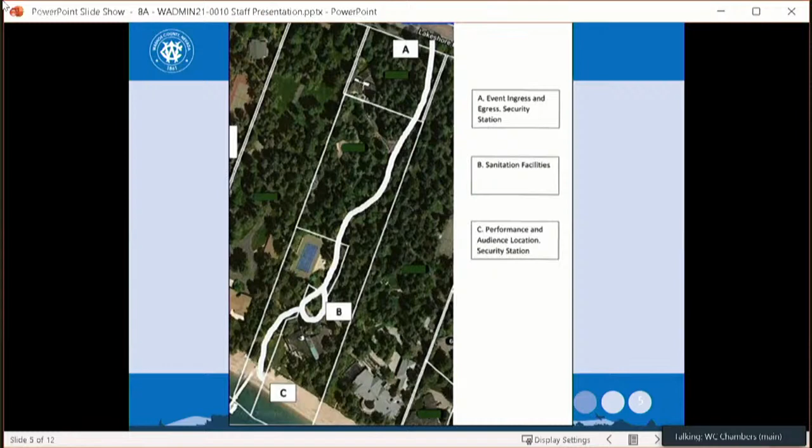Overhead is a site plan or graphic of the proposed property and event. The event ingress and egress and security station are up at the north end along Lakeshore Boulevard, under letter A. Sanitary facilities will be located in the middle of the property at B. The performance and audience location, as well as the security station, are located on the lake at letter C.

There will be no fixed seating. Seating will entail a few beach chairs, but mostly it will be standing room and beach blankets. There will be a reception for 1 hour before the concert at 4 o'clock with alcohol beverages and appetizers. The concert will run from 4 to 5:30, and everyone will be off the property at 6 p.m.

The applicant has contacted the 2 adjacent neighbors, and they both are aware of the event and have voiced no issues or concerns.

Security services will be provided by Triumph Protection Group, with 1 security guard located at the entry of the estate during the event and another guard in the reception area. Sanitation facilities will be rented for the event with 4 portable toilets and 4 hand washing stations located throughout the site. There will also be 2 outdoor bathrooms with sinks for hand washing available for use.

Off-site parking will be available at the Parasol Tahoe Foundation building. Shuttle services will be provided to transport attendees from the off-site location to the event. Also, valet parking will be provided for preferred attendees. Incline Village Community Hospital will have at least 15 volunteers to help with cleanup and trash removal from the premises, brought to the Incline Village Community Hospital.

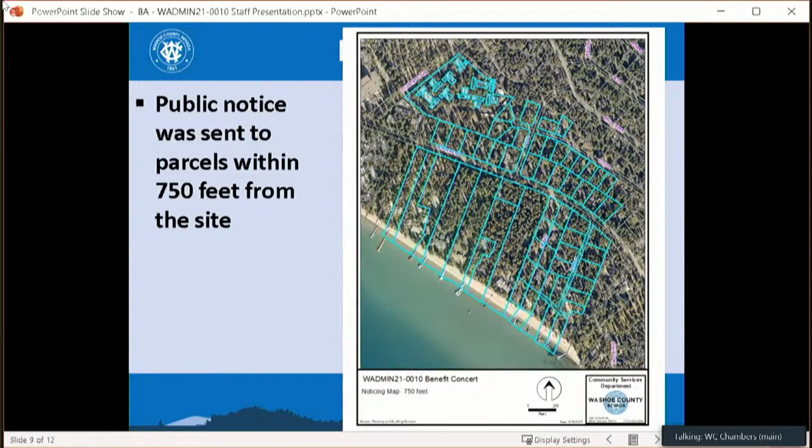This proposed administrative permit was properly noticed to residents within 750 feet of the site. Various agencies reviewed the application, and their comments and conditions are included as part of your staff report.

Staff is able to make all 5 of the required findings as shown in the staff report and recommends approval of the proposed administrative permit. That concludes my presentation. If the board chooses to approve this project or agree with staff's recommendation, we offer the following motion for your consideration. I'm available for any questions that you have.

Is there any public comment, Madam Secretary, on this item? I have no public comment. I have no public comment via Zoom.

Do we have any questions from the board? I don't have any. Thank you, I don't either. Seeing no questions, are we ready to make a motion?

Madam Chair, I'll make a motion. I move that after giving reasoned consideration to the information contained in the staff report and information received during the public hearing, the Board of Adjustment approve administrative permit case number WADMIN 21-0010 for Carly Epstein, with conditions included in Exhibit A to this matter, having made all 5 findings in accordance with the Washoe County Development Code, Section 110.808.25, that being 1, consistency, 2, improvements, 3, site suitability, 4, issuance not detrimental, and 5, effects on a military installation. Second? This is Rob.

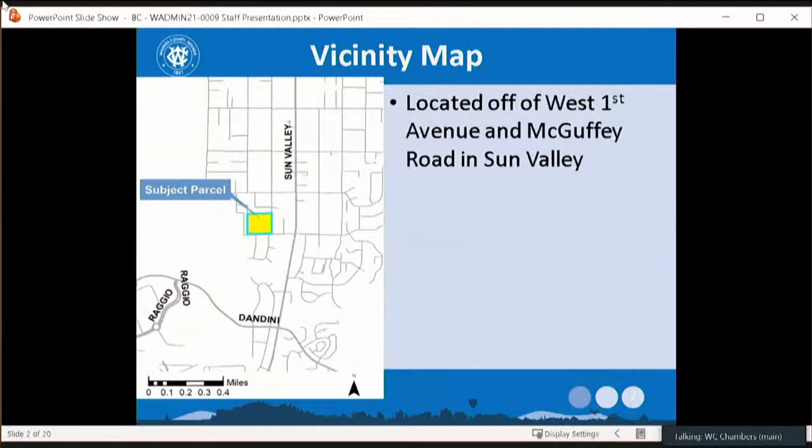The proposed project is located off of West First Avenue and McGuffey Road in Sun Valley's planning area. The request is specifically for a multifamily use type, in this case for a 200-unit apartment community. As part of this project, the request also includes grading, and the subject site is zoned medium-density urban.

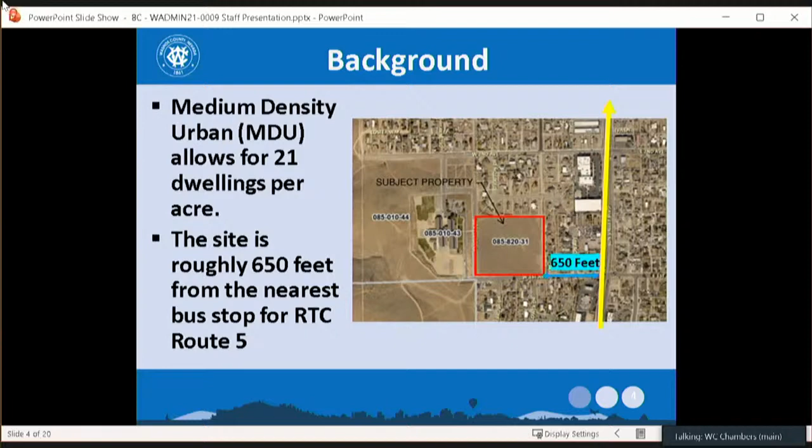With medium-density urban, this allows for 21 dwellings per acre. This site is roughly 10 acres, so it would amount to about 210 dwellings. The site is roughly 650 feet from the nearest bus stop for RTC Route 5. In the image above, the yellow line indicates RTC Route 5, and the blue line indicates distance.

This subject parcel went through an MPA and RZA, a master plan amendment and a regulatory zone amendment, in 2015. The intent was to change the master plan category from suburban residential to urban residential, and the regulatory zone from public, semi-public facilities to medium-density urban.

In 2015, as part of that application process, it was stated that this location was intended to be multifamily use.

It's looking like the clicker's not working. Did I go too far?

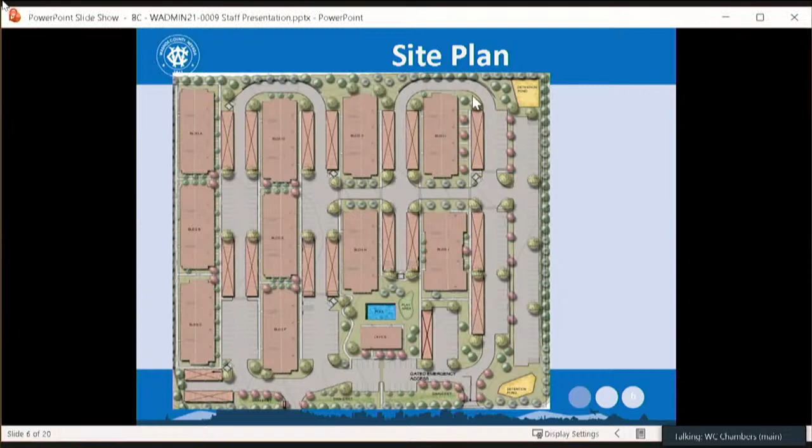This project does include 3 standard building footprints, and these standard footprints are classified as 2 stories. Under Washoe County Development Code, these are classified as 2 stories because of the basement units not classifying fully as its own story. So you will see throughout the development these 2-story structures with a section of basement units throughout.

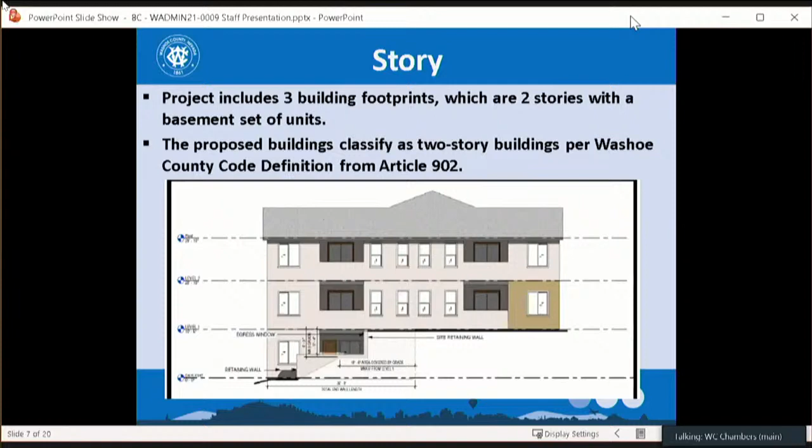With multifamily use types comes open space standards. These open space standards are related to the common open space that's shared by the residents. Our code requires 200 square feet of common open space per unit for developments of 12 or more units.

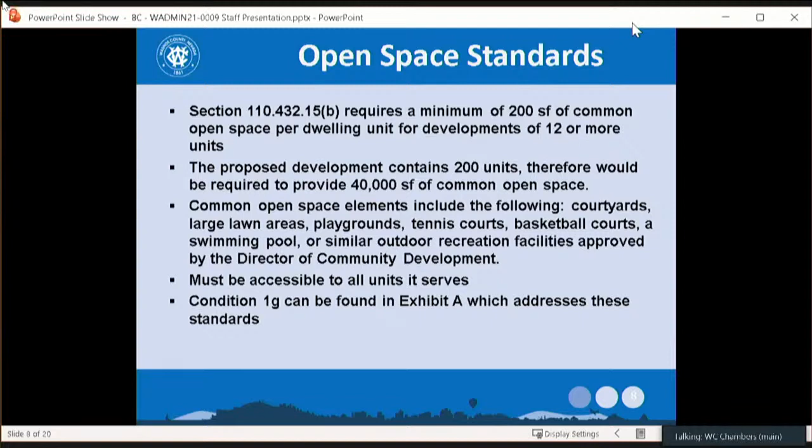So with 200 units, they're required to have 40,000 square feet of common open space. This common open space must be courtyards, swimming pools, large lawn areas, and tennis courts. One thing to note is that landscaped areas, retention ponds, and berms of that sort do not classify as common open space for residents. This standard is memorialized within the conditions of approval and can be found as Condition 1G.

As mentioned earlier, this project does request grading as part of it. The project as a whole triggers 4 specific grading standards. The first is grading an area more than 4 acres. The next 2 are volume related, excavation and importation of 5,000 cubic yards of material. And the last is to grade or construct a permanent earthen structure greater than 4.5 feet in the front yard setback.

The grading calculations that came through were a total disturbed area of 392,736 square feet. The total cut is just under 30,000 cubic yards, and the total fill is roughly 54,000 cubic yards. It should be noted that the finished grade will contain amenities as well as building footprints at the final product.

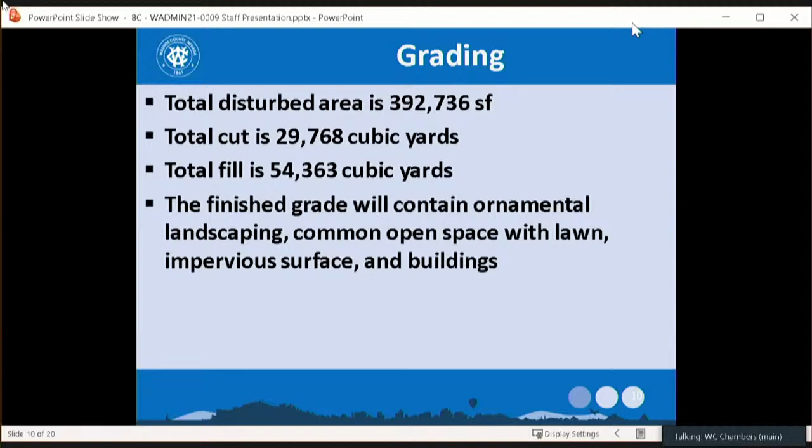With this application, there were retaining walls associated with it. The original site plan that was provided shows retaining walls ranging from 1 to 15 feet. Because this is an administrative permit, staff does not have the ability to waive or modify standards, so the applicant will be required to meet the retaining wall requirements as set forth in code.

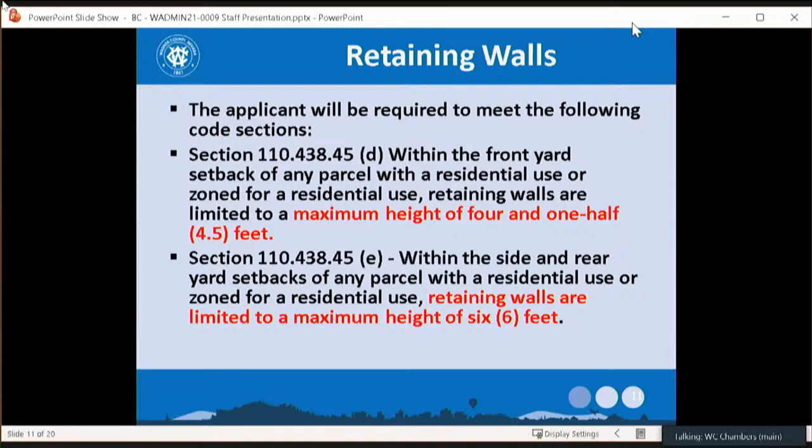The code sections are listed above, but they will be required to have retaining walls in any front yard at a maximum of 4.5 feet, and any retaining walls found within the side and rear yard are limited to 6 feet.

The applicant did provide staff with a preliminary site plan exhibit earlier this week, which should have been provided to the board as well. The intent of this site plan exhibit was to show staff that they could move forward and meet the standards of the retaining walls while still maintaining substantial conformance.

However, with that new exhibit, staff is requesting a new condition be listed within Exhibit A. That condition is: any terraces or benches between retaining walls shall be landscaped.

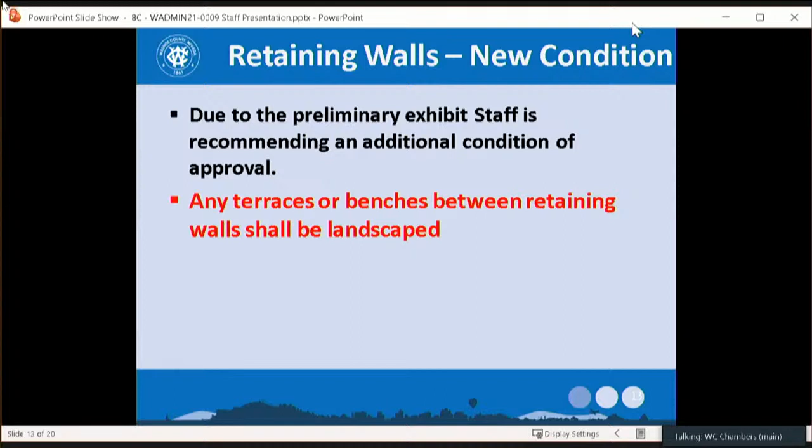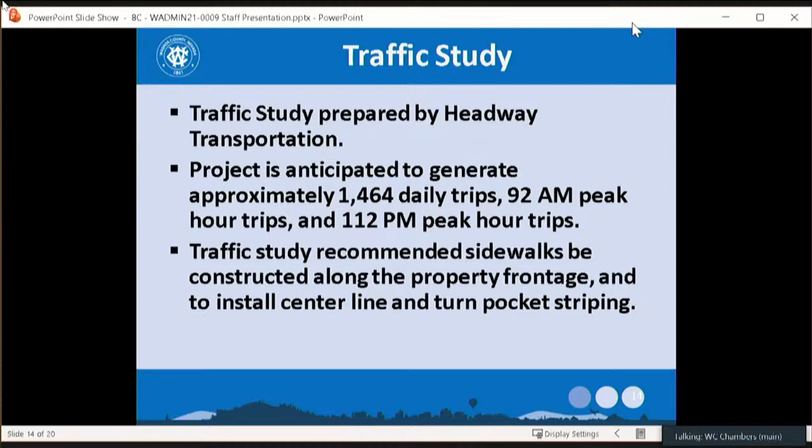Due to the size of this project, a traffic study was required. It was prepared by Headway Transportation, and they anticipate this project to generate 1,464 daily trips, 92 AM peak trips, and 112 PM peak trips. The traffic study did recommend sidewalks be constructed along the property frontage, and centerline and turn pocket striping also be done.

NDOT did review this traffic study. They stated that the intersections are expected to operate within policy level and did not have any recommended improvements for the intersection at this time. Additionally, the Regional Transportation Commission, RTC, did review this project application as well, and they do recommend all improvements be implemented.

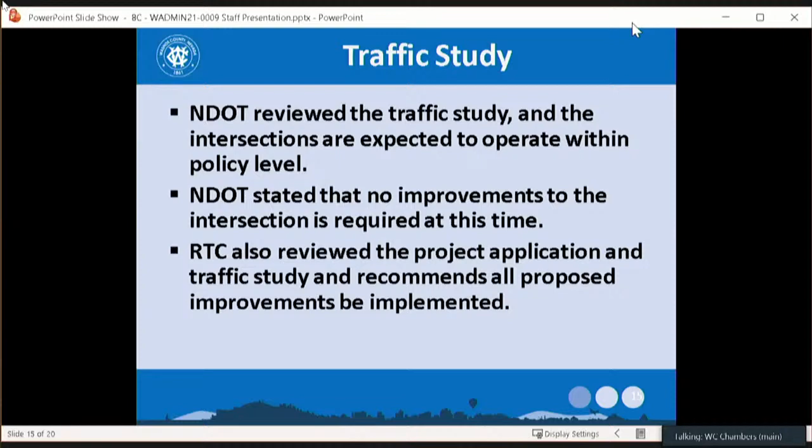There was a neighborhood meeting associated with this project. The applicant initiated that meeting and held it at Hobie's Casino on August 12th from 6 p.m. to 7 p.m. Nine neighbors showed up. Notices were sent out July 28th to over 200 parcels, and the applicant noticed a minimum of 750 feet. For staff's public notice, we noticed 102 parcels within 500 feet of the subject site.

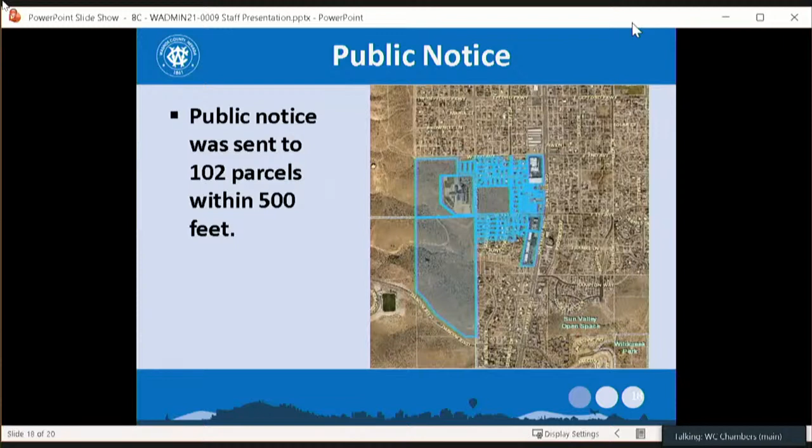Is the applicant here and would like to make a presentation?

My name's Connor Lahr. I'm a partner of Ulysses Development Group. We're a Denver-based developer and owner of quality, affordable housing. We're active nationwide, and we thank the board this afternoon for meeting to consider our project. I just wanted to introduce myself, and we have a team on the line available to answer questions: Jeff Frame from Frame Architecture, Lauren Chilson the traffic engineer, Matt Sutherland on the civil side, and myself and my colleague Ryan Watt, who will be standing up and walking through the details of the project. Thank you very much.

Thank you, Connor. Please flip to the next slide.

As you all are aware, the site is about 10 acres in size, located about a quarter of a mile to the west of West First Avenue and Sun Valley Boulevard. Please flip to the next slide.

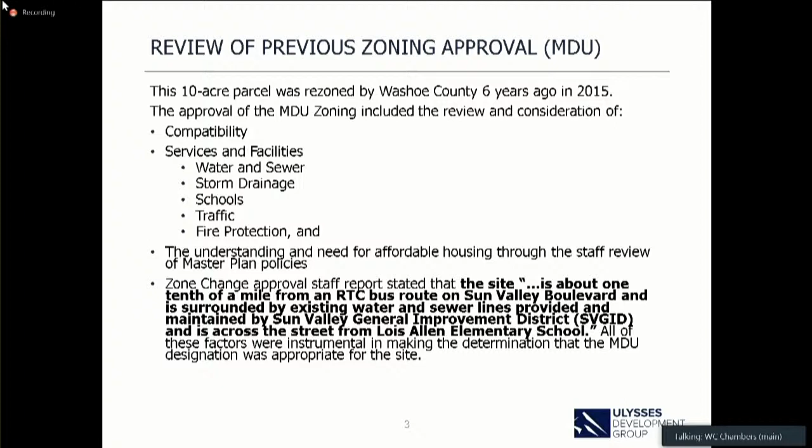As mentioned, the site is zoned as medium-density urban. It's important to note that in the 2015 approval by the Washoe County Planning Commission, the main influence that drove that decision was the appropriateness of this location for that use, specifically the proximity to existing utility services, transportation, employment centers, and schools as well. Next slide, please.

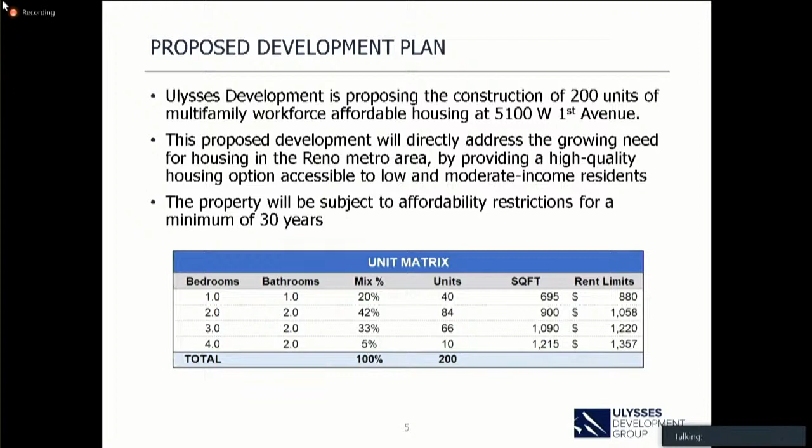Please flip to the next slide. Our development proposal in front of you today aims to address that need for affordable housing directly by providing a high-quality, newly constructed, affordable apartment community that provides access to housing for low-income households in Washoe County for a minimum of 30 years. The rents you see in this unit matrix are rent limits. Residents will be required to provide proof of employment and proof of income in order to lease a unit at the property. They are not rental subsidies. This is under the Section 42 tax credit program.

For the record, Dave Snellgrove with CFA. I'm the Planning and Right-of-Way Manager.

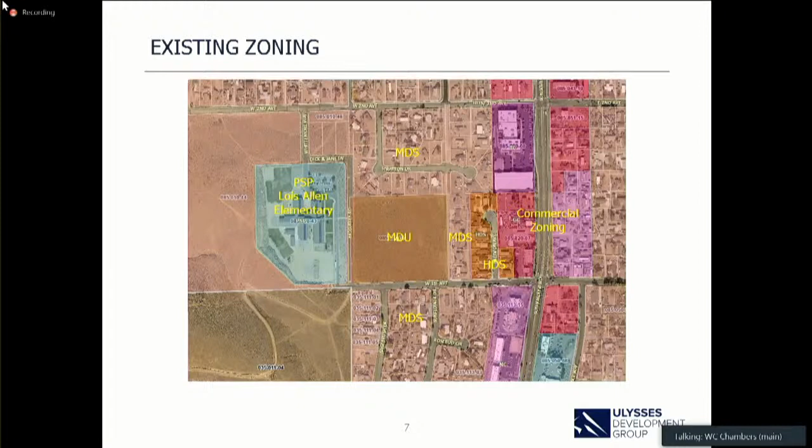This is just a copy of the zoning map, and this shows proximity to different uses. We've got Lois Allen Elementary School directly to the west of us. We will have pedestrian access on the sidewalks, plus one on the northwest part of the site that'll go directly up. There's a crosswalk that crosses McGuffey Road, so this will provide very convenient access for many of the elementary age kids who'll live in the project. Directly to the east of us, you have a commercial zoning area that provides services and employment, and gives you the bus route that Chris talked about too. I'll have another slide on that. Around us, directly adjacent, is medium density suburban, and our property is medium density urban. Next slide, please. This shows the developability of the site.

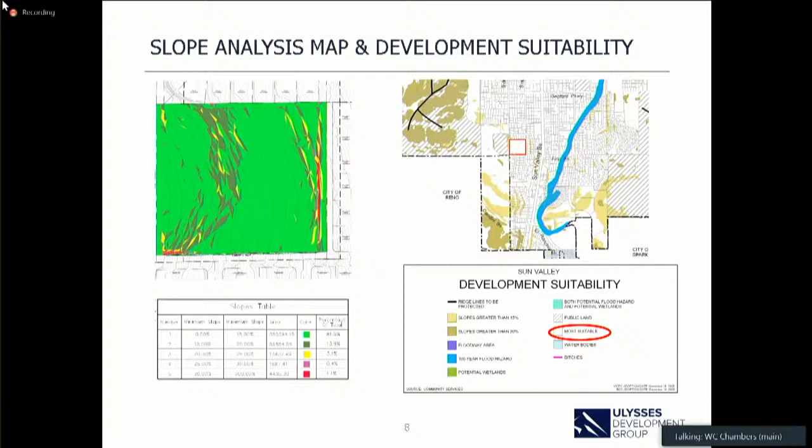To the left-hand side, you see a slope analysis map. The vast majority of this site is in green, which is 0 to 15% slopes, considered and supported by that map on the right to be the most suitable areas for development. Much of the Sun Valley area does have slopes to it. This is no different, but we are in the most suitable areas for development.

These are photos of the existing site. That one in the upper left-hand corner is on McGuffey Road. The school would be just to the right-hand side in that photo. Over to the upper right-hand side, that's at the corner of Slope Drive, which is only a halfway constructed street right now, Slope Drive and West First, looking up the frontage of our property.

On the northeast corner, that one at the bottom, I want to point this out. This is along Slope Drive, and this shows a narrow section of pavement. There is a slope down, and right now if there's stormwater coming down, it comes unimpeded and can go across Slope Drive. With the proposed development, the rest of the street will get constructed: there will be curb, gutter, and sidewalk, and we'll have retaining structures that stop the water from having an unimpeded path down the hill.

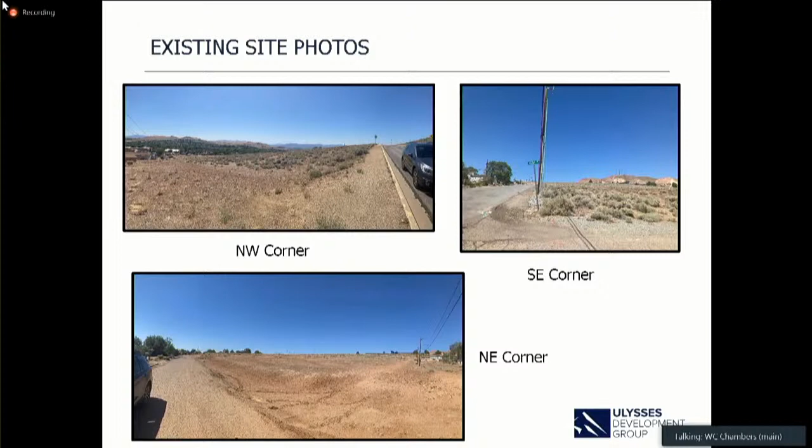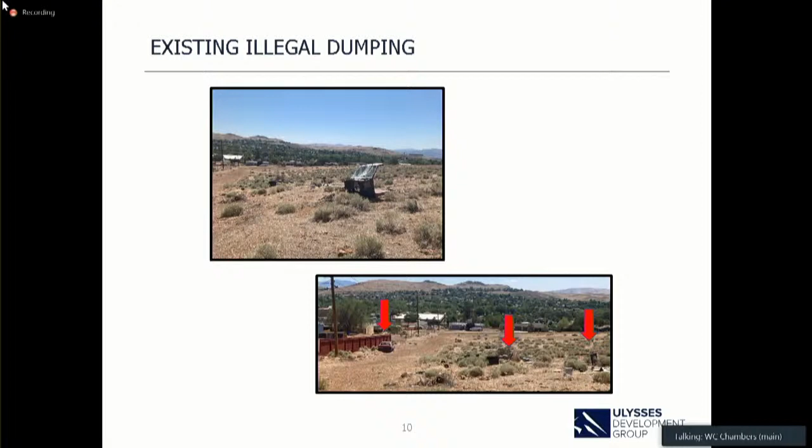There is some illegal dumping on the site. It's definitely not the worst I've ever seen on vacant land. Up towards the northern end of the property, there are some items right next to the existing residential. I pointed out one a little farther away so you could see where some were spread out.

Our transit and connectivity, Chris covered this. Our site is right there where the star is. This matches up with what we had from the corner of the property. We're only 650 feet away. This was identified in the zone change and master plan amendment as approximately 1/10 of a mile to transit and to the commercial corridor where services and employment are.

This shows good proximity. Route 5 can take you down, and there are a couple other routes, I think 2 and 15, that can get you to Parr Boulevard and Truckee Meadows Community College and different places. You can also get down to the city center, downtown, and anywhere you need to go. So if low-income folks living here don't have a car, they still have transit opportunities close by.

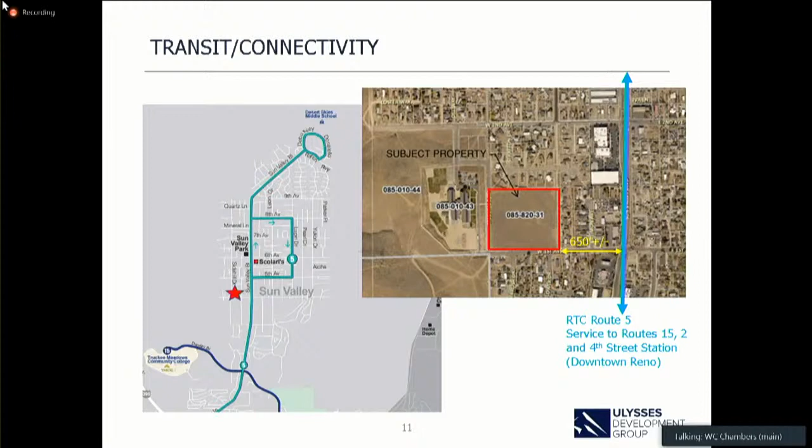Our site plan, Chris covered this. I do want to point out that on the east, west, and southern portions of the site, there's not currently sidewalk on any of those frontages, and this is right adjacent to a school. That new improvement will help safe routes to school and general pedestrian activity around the area, which we see as a tremendous positive in the neighborhood. There are 10 total buildings, each with 20 units, for a total of 200 units, and as Chris identified, we do meet the parking requirements per the Washoe County Code.

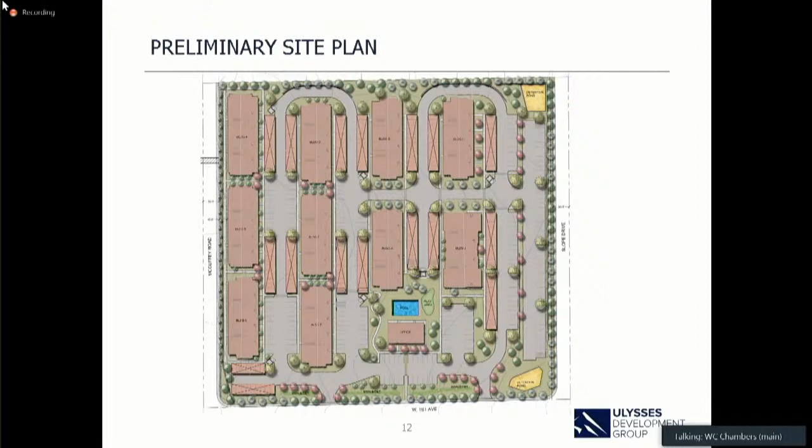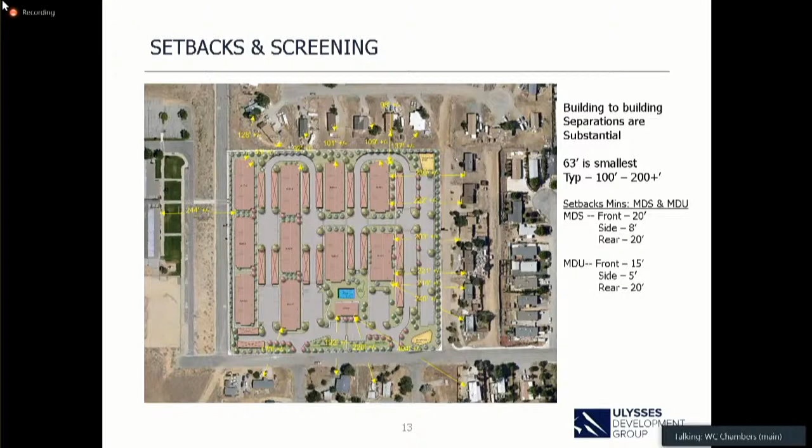This shows the general distance from building to building, not really setbacks. The closest and smallest is up towards the northwest corner of the site, at 63 feet, but most are 100 to over 200 feet, with some getting close to the 240 to 250 range. So we do have a good setback, even though this is a medium density urban project. We've pulled away, and around the sides, the north side and the Slope Drive side, will be planted almost exclusively with evergreens for year-round screening that will help with lighting and visibility issues.

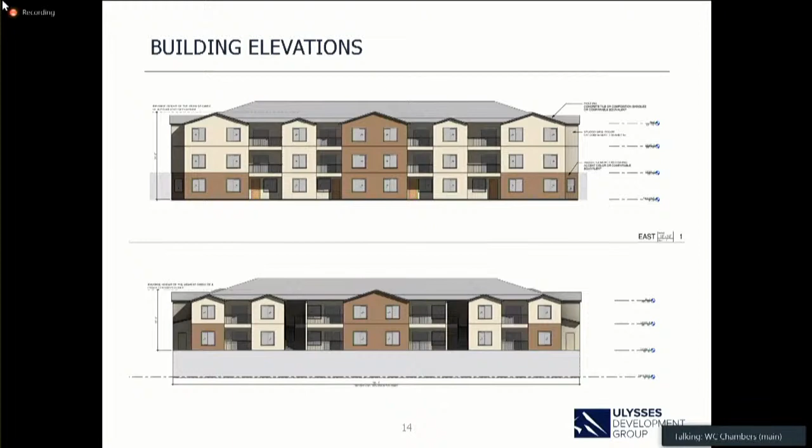These elevations give you a visual representation of what the building facades will look like once construction is complete.

Probably a better example to help you visualize the community once construction is complete are two existing low-income housing tax credit communities in the Reno area. One is Steamboat by Vintage, located in South Reno, and the other is Vintage at Citi Vista, located in downtown Reno. Both of these projects benefit from the same Section 42 LIHTC program that this proposed project will benefit from. Also, these two projects are managed by the same management company that will manage the Ridge at Sun Valley, which is FPI Management.

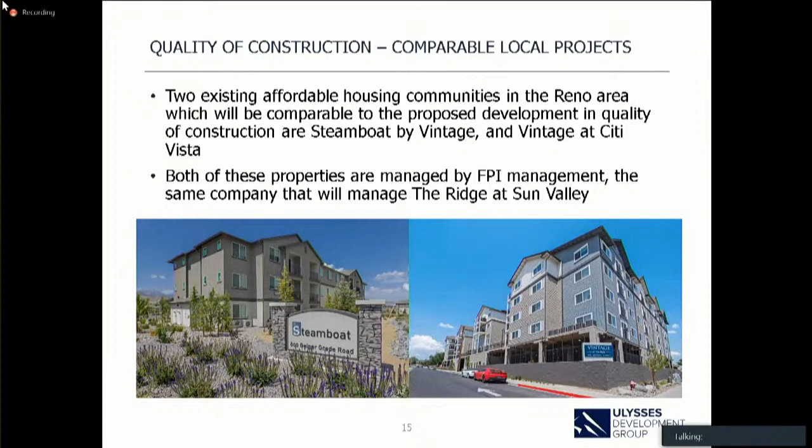One thing I wanted to add is that so far there are over 5,700 units of low-income housing tax credit properties in the Reno area, and hopefully this would add to that existing inventory if approved.

To speak a little bit about quality of construction, once this project is complete, we hope for it to be completely indistinguishable from traditional market rate housing. So unit interiors will include in-unit washers and dryers, granite stone countertops, luxury vinyl plank flooring, and energy efficient appliances. Common area amenities will include an outdoor swimming pool, business center, fitness center, and furnished community room.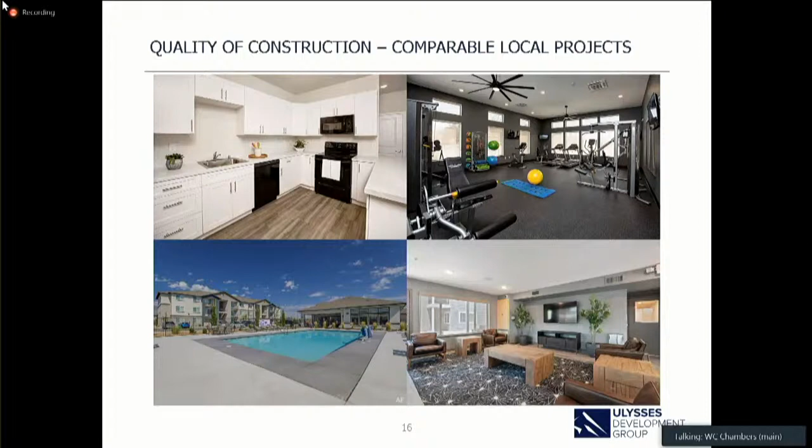As Chris mentioned, we held the neighborhood meeting independently. Typically, we would have gone to a citizens advisory board meeting for this permit application process, but because the local citizens advisory board only meets four times a year, we decided to hold our own meeting independently to make sure we had local input from the community. We provided notices to over 200 property owners in the immediate area and solicited their feedback at this meeting.

Some of the concerns that were raised: first, we received concern about the compatibility of the use with the neighborhood. In response, as Dave mentioned, we're going to be providing extensive screening around the exterior of the site to prevent any noise or light pollution from reaching the nearby neighbors. We're also providing setbacks from those other uses that are well in excess of the minimum requirements for this zoning designation.

We also received some concern about security at the property once the community is complete. In response, we are going to have an on-site management company that will deal with any security complaints as they come up, as well as a security patrol service that will patrol the property after hours to make sure any security issues are addressed right then and there. We'll also install security cameras at the site to consistently monitor what's going on at the property.

We will also have in place extensive resident screening criteria, which will include a criminal background check, a credit check, employment verification, and income verification. Some of these are required by the Section 42 program, but we intend to go above and beyond that to make sure we have a community of residents that is an active, productive part of the community. I'll hand it off to Dave.

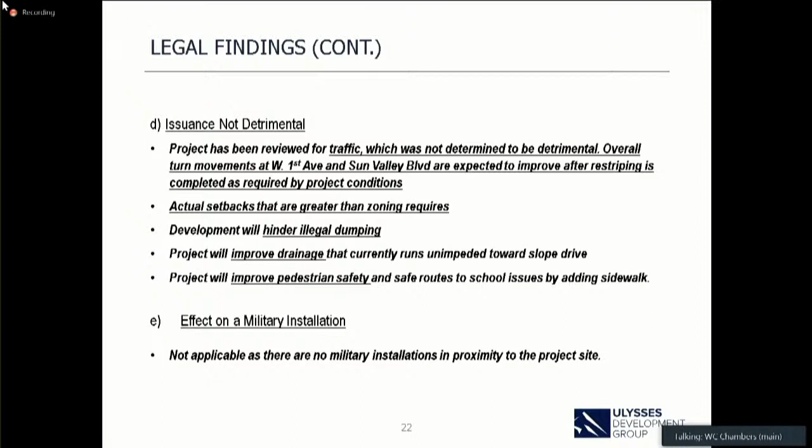Next slide, please. The traffic was not determined to be detrimental—this is the issuance not detrimental finding that needs to be made. That was one of the bigger questions, relative to traffic. Setbacks are greater than what the zoning requires. This will hinder illegal dumping—anytime you do development, it's kind of weird, but it doesn't provide that opportunity in an area where you can start to see illegal dumping. It also improves drainage and improves pedestrian safety. As for the military installation, we don't have anything close.

Next slide, which I think is our last slide. We are in agreement with staff's recommendation and the findings, and additionally those changed conditions that they presented. We do stand available for any questions you may have.

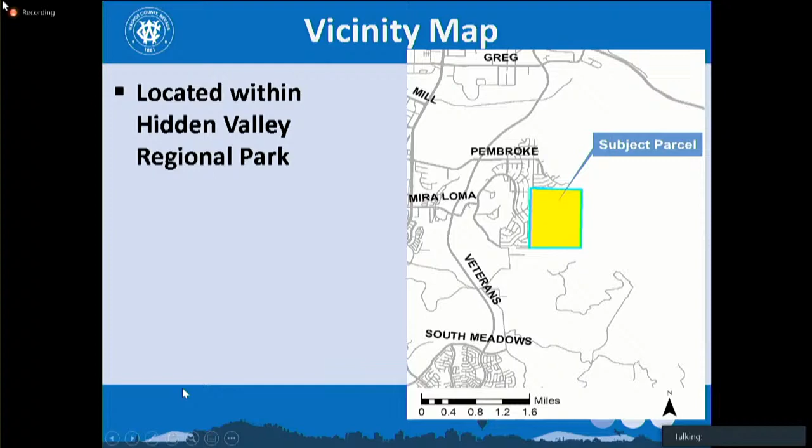So the request is specifically to allow for a 1 million gallon water tank. There's been some confusion with reading this application, and I wanted to clarify. Within the site selection memo that is part of the exhibits, there's mention of a 1.4 million gallon water tank proposal. That has been reduced.

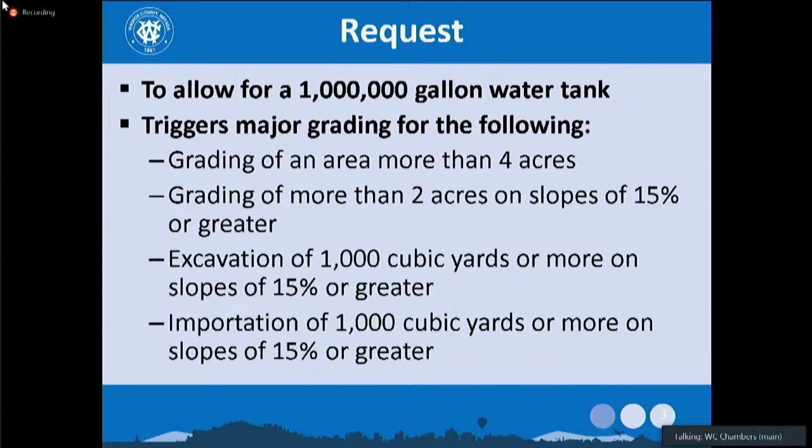The official application request is for 1 million gallons, and as part of this request, it triggers significant major grading thresholds. Those thresholds are grading of an area more than 4 acres, grading of more than 2 acres on slopes 15% or greater, excavation of 1,000 cubic yards or more on slopes of 15% or greater, and importation of 1,000 cubic yards or more on slopes of 15% or greater.

Next slide, please. As part of this request, the applicant is requesting to vary grading standards as well. Those standards being requested to be varied or waived are landscaping requirements. Our code would require landscaping around disturbed areas and new developed areas. Additionally, they are requesting to vary standards to allow for slopes greater than 3:1 and grading to vary more than 10 feet in elevation. This is specific to allowing for 32-foot tall retaining walls.

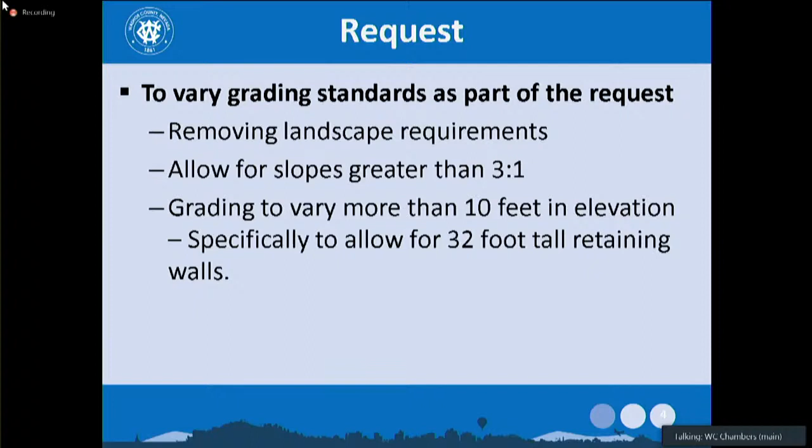In addition, the applicant is also requesting to vary modifiers found in Article 212. Those modifiers are specific to the Hidden Valley area, and they're also to allow for slopes greater than 3:1, grading to vary more than 10 feet in elevation, and to allow retaining walls greater than 8 feet in elevation.

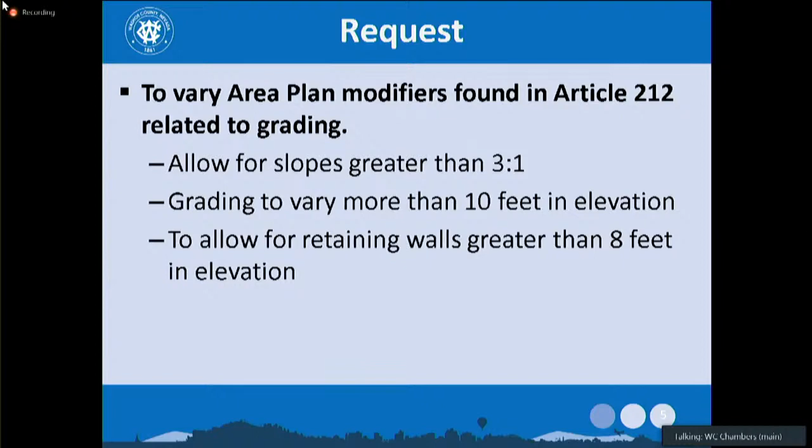So here's the site plan close-up of the tank. As you can see on the southwest area, you'll see the 32-foot wall head to a 30-foot wall, tapering down from there to much lower retaining wall heights. On the opposite side, the tallest retaining wall is 12.5 feet.

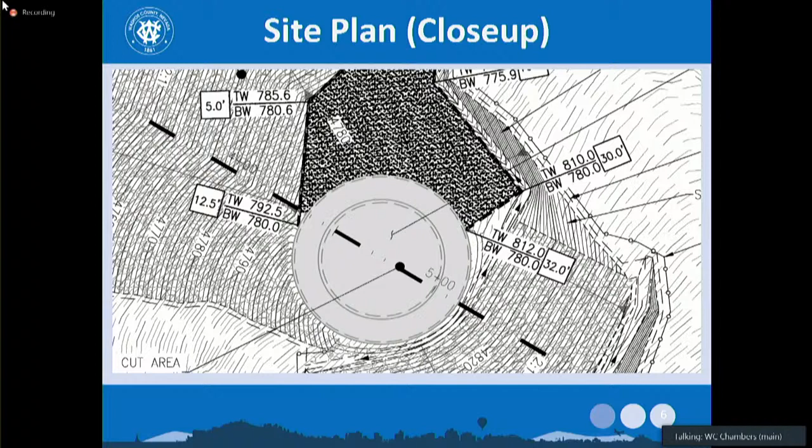Next slide, please. As part of this request, staff worked with our Parks Division on the landscaping requirement. With the landscaping, ornamental landscaping would be required. This isn't desirable to park staff, nor to planning staff who reviewed this. Instead, the applicant will be required to revegetate all disturbed areas and provide temporary irrigation to these revegetated locations to make sure the seed mixes establish.

Staff is supportive of the applicant's proposal and request for the varied standards of 3-to-1 slopes and retaining walls greater than 8 feet. The reason is that if the applicant was required to meet standard requirements, the majority of that mountain would be scarred and cut. You would have 3-to-1 slopes as well as numerous retaining walls and terraces all the way up. With this varied request, it significantly reduces the amount of scarring and disturbance while allowing the majority of the tank to be shielded from view.

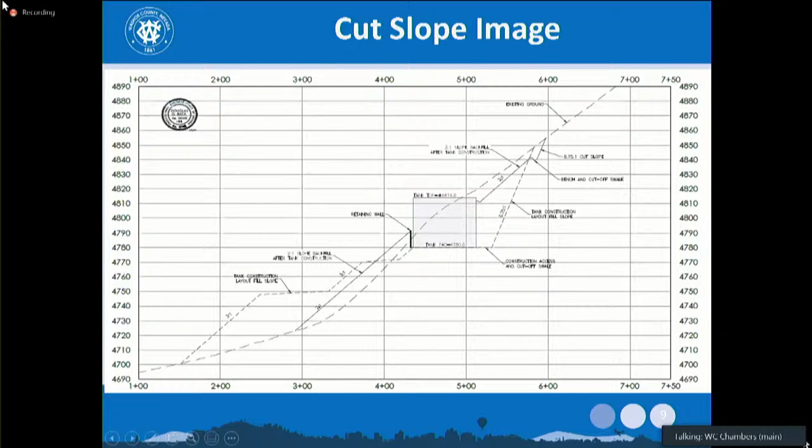Next slide, please. This project was noticed to 223 affected property owners within 500 feet, and staff did receive numerous phone calls and emails related to this project. Almost all of those were not supportive of the project. The primary concerns were related to visual impacts, impacts on the trails, and impacts on the park.

We also did receive public comment as early as this morning related to this project, and I believe that public comment was provided to you before the meeting. Next slide, please. So staff is recommending approval with conditions for this application. I've provided a possible motion above, and I'm available for any questions you may have. Thank you.

Is the applicant available for presentation?

Good afternoon. Let me take this off. For the record, Mike Rayleigh with Christie Corporation, representing Washoe County. If we can get that presentation.

Next slide, please. Some of these first slides are a little repetitive to Chris's presentation. I think he did a great job. This just gives you the location map, obviously, within the Hidden Valley Regional Park. Next slide.

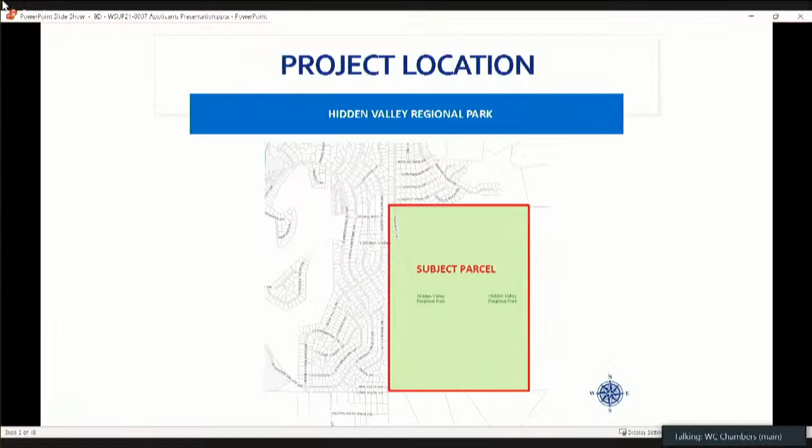Chris did a great job going through the actual request, so I'll spare you the repeat of that. But this is an overall kind of map of the park and how the tank site relates to the existing facilities. On the north, you'll see the existing developed equestrian center within the park, and there are 2 existing tanks in the park. Our tank is set in that little saddle, so to speak, just to the south of the existing tanks.

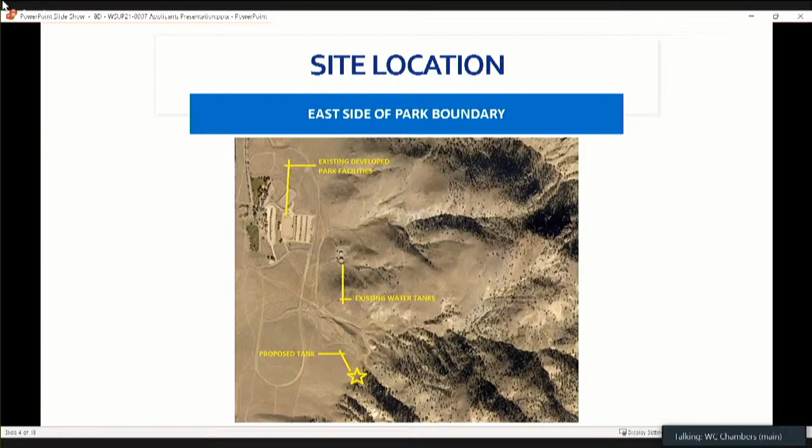And that's our overall site plan showing the access road coming up from the existing internal dirt loop road up to the tank itself.

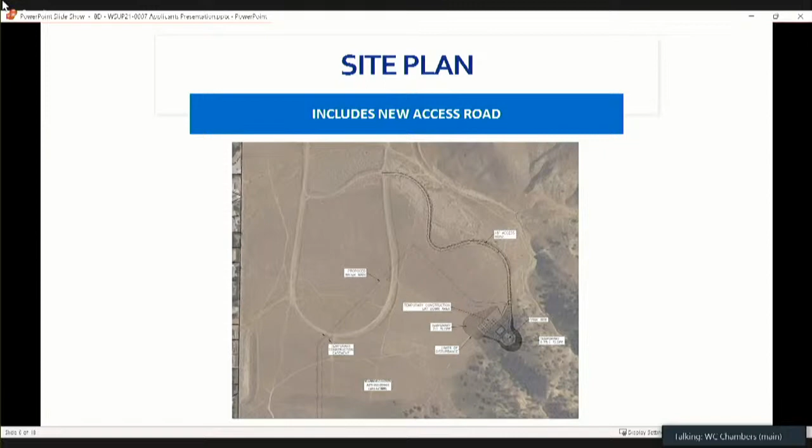As Chris went over, it sounds fairly complicated to a layman, all these requests we're asking for on the grading, but really what these deviations are for is to reduce the amount of scarring. Doing 3-to-1 and 4-to-1 slopes above the tank would literally take down the mountain. Water tanks obviously have to be at a higher elevation, usually on hillsides, and that's why the code allows for these provisions to vary those standards in unique circumstances like this.

This is a 1 million gallon reclaimed water tank, not 1.4, just to clarify. The tank is needed for irrigation of park facilities, the Hidden Valley Golf Course, and for a proposed rapid infiltration basin and park wetland improvements. The use of reclaimed water will allow potable water currently being used within the park to be reserved and reallocated for other municipal purposes, so it has quite a few benefits from a public standpoint.

The site was chosen based on the availability to connect with existing infrastructure and to reduce the visual impacts I mentioned earlier. It's also important to note a lot of the public comment was from residents in the neighborhood directly to the west, and the closest resident to the site is about 1,800 feet, so it really is a good distance away from those existing homes.

The grading and the deviations being requested will greatly reduce the amount of disturbance and scarring. Everything will be completely revegetated, and at the end of the day, combined with the color of the tank, it will really help it blend much better than some of the other tanks you see in the region.

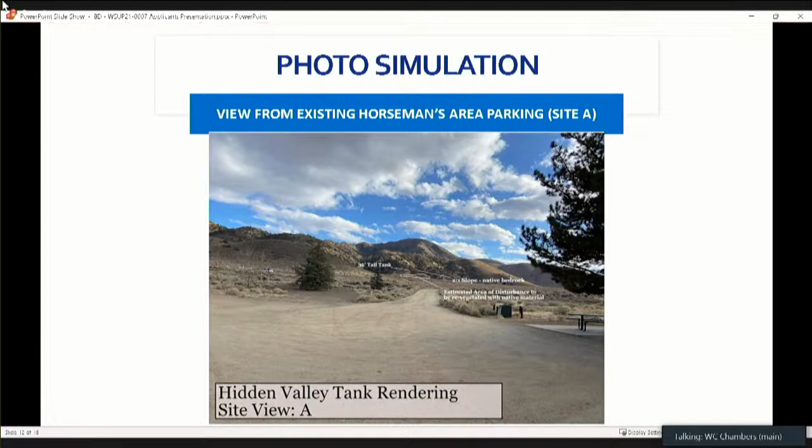This is taken from Site A, which is along the western property boundary of the park and the existing homes. As you can see, the area that's outlined will be disturbed during the process, but then returned with native vegetation. The grading we're proposing would allow that to essentially match the existing current grade, creating a natural transition up to the tank.

So from the north, where the developed park facilities are, the tank is not visible at all. It's hidden by the intervening ridge. So that's an easy one.

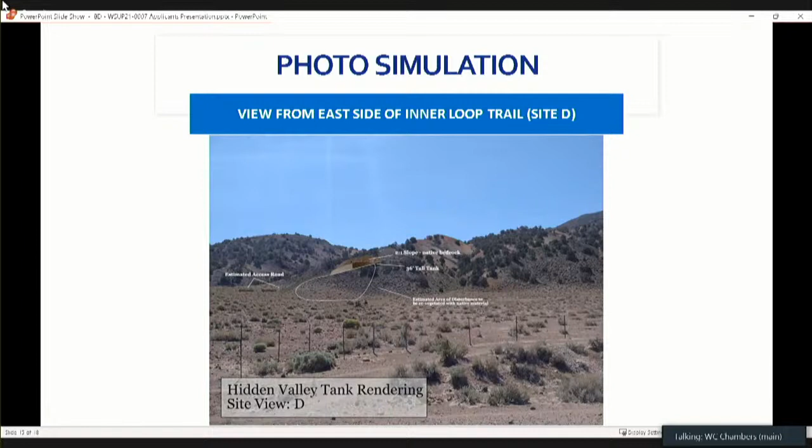Next slide. This is within the park itself, the trail system. This gives you a little bit more of a close-up view of what the tank will look like. And once again, you'll see that area outlined, the area that will be revegetated in the post-construction phase.

The tank location and design went to the Parks and Open Space Commission twice, and they recommended approval. The CAB also recommended approval of the project. It does provide a public benefit. It does not conflict with the existing amenities within the parks, including the trails, and allows for that potable water to be reserved and reallocated for municipal purposes. So it has several benefits to the project.

Next slide. So we do have the entire project team here: Scott Benedict with SB Engineering, Doug Buck with Christie Corporation attending via Zoom, Alan Jones and Dwayne Smith with Capital Engineering and Capital Projects, and Sophia with Washoe County Parks is also in attendance to answer any questions you might have. Okay, thank you very much.

Madam Secretary, do we have any public comment? Yes, I have Edward Vahorn.

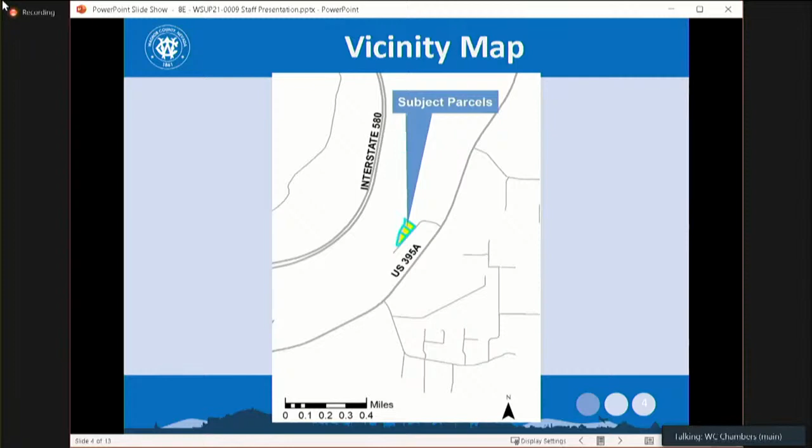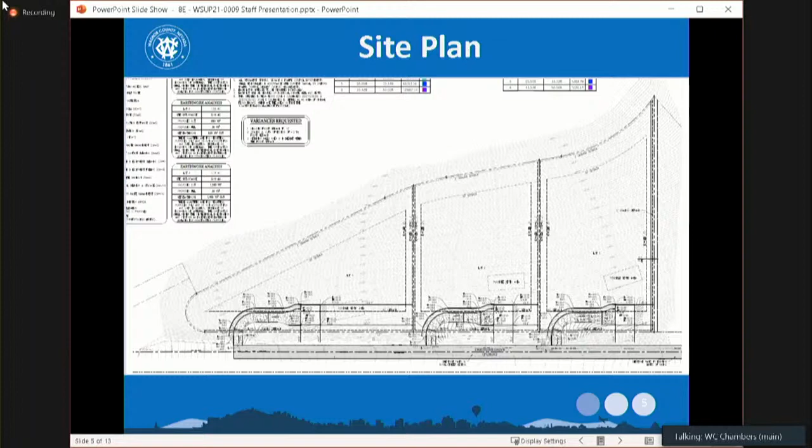So I've provided a vicinity map. This is 3 parcels off of Cheyenne Drive, adjacent to US 395A, with Interstate 580 to the north. I also provided a site plan—as you can see, the existing setbacks shown are for those 30 feet. We have curved driveways going in and leading to a building pad. Next slide.

Attached is a close-up of the site plan. You'll see the retaining walls to the north of that driveway, as well as the building pad, and the 30-foot setback showing how far into the setback this development would be.

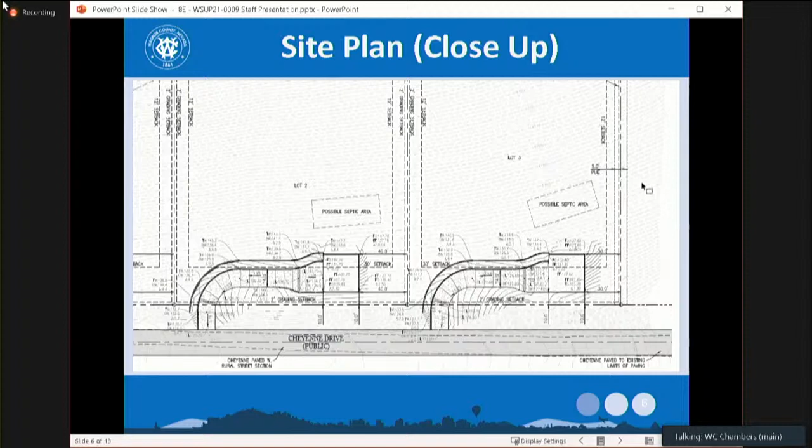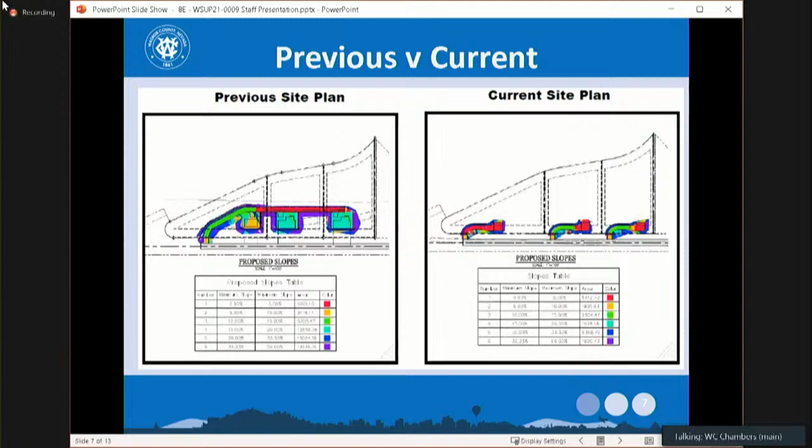With the previous site plan, the chart above shows what was provided to staff within the application, including all proposed cuts, fills, and wall lengths. With the current site plan, we see a total disturbance reduction of 0.88 acres, a total reduction in fill by 3,620 cubic yards, and a total reduction in wall length by 780 feet.

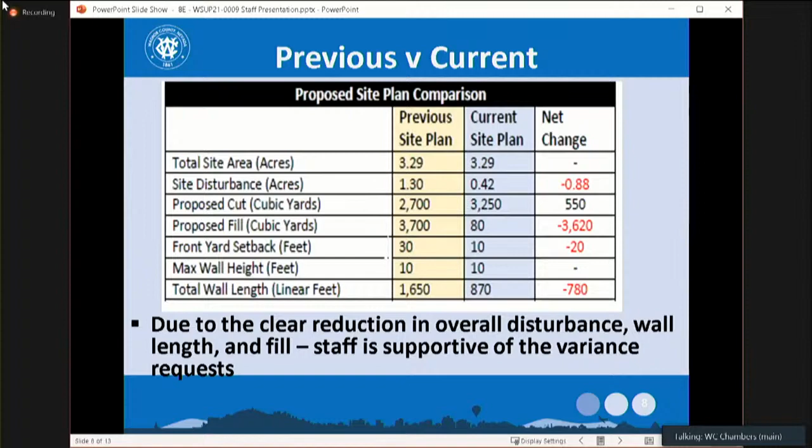However, in order for the applicant to receive these significant reductions, it also plays into their request for a reduction in the front yard setback. Due to the clear reduction in overall disturbance, staff does support the variance requests.

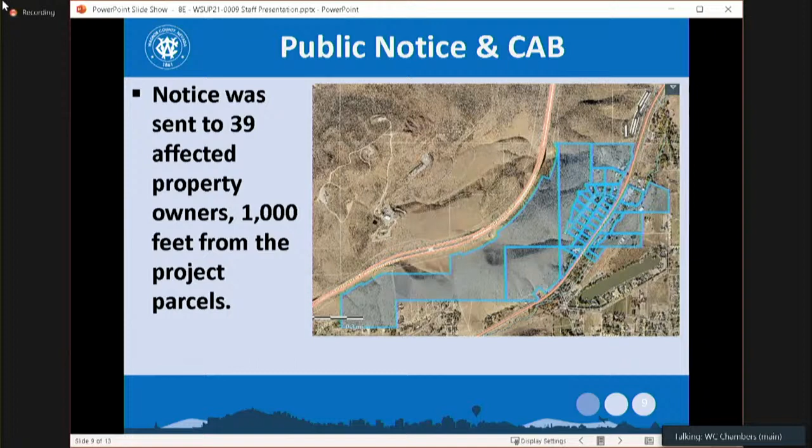Notice was sent to 39 property owners within 1,000 feet of the project parcels.

This project was presented to the May 6th South Truckee Meadows Washoe Valley CAB. The discussions at that meeting related to grading, specifically runoff, flood concerns, drainage, as well as the retaining walls associated with the original project.

Additional concerns were related to modular or manufactured homes instead of stick-built homes, and the existing CC&Rs on the property. The CAB did vote to deny the original proposal. As a result, the applicant came back and did a redesign, which is what you are seeing before you today.

Staff has received public comment in the form of emails and phone calls. Those concerns are related to the existing CC&Rs, the fact that the applicant didn't acknowledge existing CC&Rs in their original application, an incomplete plan, increased runoff related to drainage, and decrease in value of current residences.

The following findings are consistency, improvements, site suitability, issuance not detrimental, and effect on a military installation. Staff is able to make all the required findings for this project.

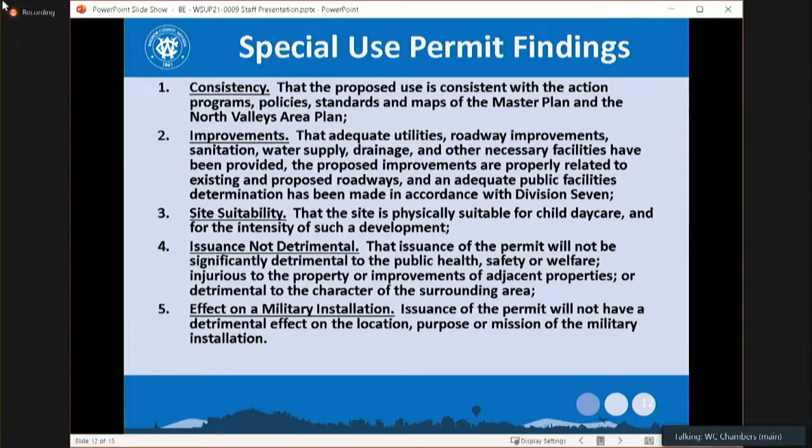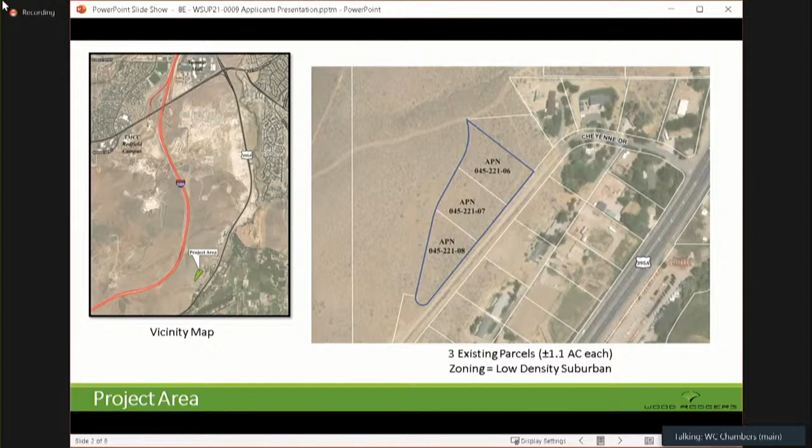The slopes are somewhat challenging for these existing parcels. We went to the CAB and listened to them, and we've come back with a significantly different plan. I think their comments were well received, and we went back to the drawing board, and sometimes you have to do that.

For these lots, what we've done is try to really pull them forward. The slope basically runs from the top of the lot down to Cheyenne Drive. Cheyenne Drive did create some challenges when they graded it for accessing the lots, and that's why in the original plan we had to go up above, which didn't work as well as we had hoped.

Coming back with this current plan, essentially we're looking at each lot accessing off of Cheyenne Drive, which requires us to pull those lots forward so we can stay out of the upper part of the slope. The further back that house pad goes, the more disturbance we're going to have.

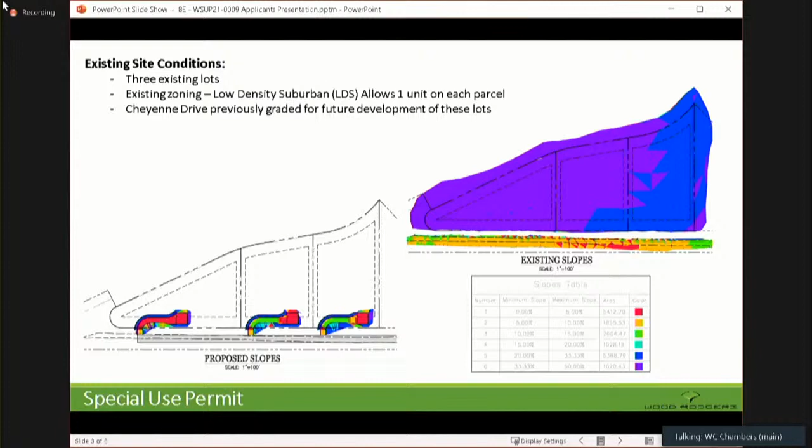So the plan now for these lots is to really pull them forward and create what the CAB had asked us to do, which is create a custom lot that fits with the existing terrain of the parcel.

Basically, the driveway will come up, and the two dark black lines on each driveway represent a stepped wall concept, which helps reduce wall heights and stagger them a bit. You'd have this lower pad for the garage at ground level, and then the house. These are no longer manufactured or modular homes—they'd be custom built to these pads, where you drive up to the garage level and the house is built into the hill above that.

Since these are custom homes, we don't know exactly what architecture will happen with them. These are basically pads that give these lots access, with the majority of grading completed, and a pad where the garage would go to build vertically up into the lot.

So that's basically what this SUP is asking for—the grading to create access to these parcels. They'll be built at some point; they're existing legal parcels. We feel like with this plan, we've listened to the CAB but also created a plan showing the minimum amount of disturbance needed to actually build on these parcels.

Some of the mitigation we've discussed, based on the CAB's direction, includes variances to the standards, fills in the front yards, and reducing that setback to keep it minimal. We pulled the pads down the hill, reduced a lot of the required walls, essentially removed all the fill, and drastically reduced the grading and disturbance requirements for these parcels.

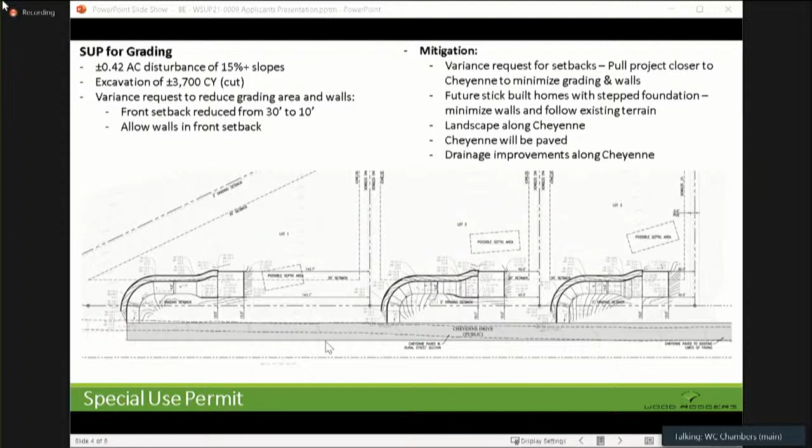The wall type we're proposing is a somewhat innovative wall. It's been used in other areas, and the idea is that it allows a stronger wall—one that meets a structural standard—compared to a rockery wall, which typically only goes 6 feet. These walls would allow us to go a bit higher.

I know 10 feet was talked about—that's mainly where the garage walls are. When you go vertical with the house, these retaining walls are actually shorter than 10 feet, in some cases down to 4 or 5 feet. But in some cases where we get into the 7s, it allows us to go a bit taller than rockery walls while still providing the same, if not better, stabilization of the hillside.

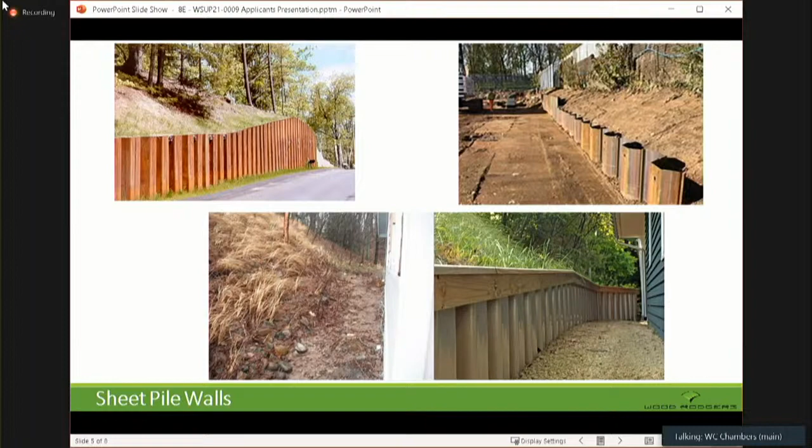So that's where we've shown some examples of how these walls have been used in other applications.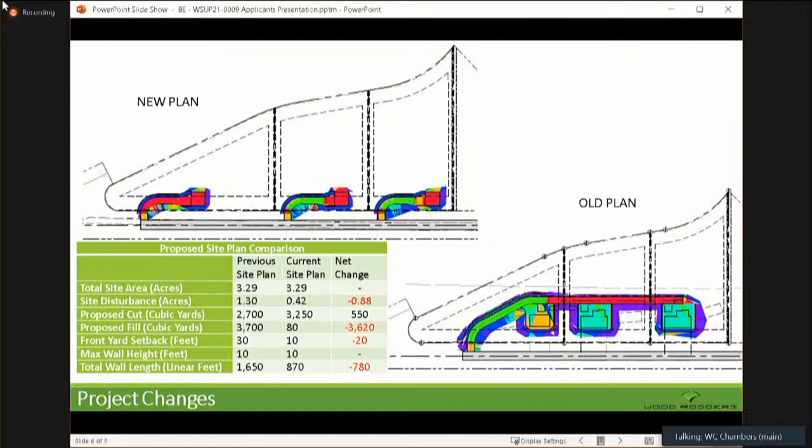So some of the comments we heard from the CAB have been addressed in this new plan. A CAB member brought up manufactured housing—we weren't aware that existed in the CC&Rs at the time. Our applicant went back and reviewed that, and we're in agreement that these will be custom stick-built homes, not modular.

They're not going to be manufactured. They will be traditional stick-built, kind of tied into that terrain. There was a comment about the flat pads and the stepped walls, and we kind of talked about where we've gone away from that. We've gone to the step pads, we've pulled everything down the hill, and drastically reduced the amount of disturbed area. The future custom homes will be built above the garage into the hillside, which is exactly what the CAB had asked for.

And then there were some concerns about drainage. I think there was an email we saw recently that pointed out some existing conditions that has nothing to do with the existing parcels as today. And if anything, we're going to be going in there, per county code and per the conditions of approval, we will be looking at new detention facilities along the ditch along Cheyenne Drive, making sure that as this grading takes place and these houses are built, we're not exacerbating that situation.

That is a county code requirement. But as we come through, this is the first step in a process. As we come in with building permits and grading permits, the county will be looking at us addressing those conditions and addressing those specific drainage elements. So we are planning to pave Cheyenne, and we are planning to fix that ditch. Those are two of the things I think will really help address some of the comments they brought up.

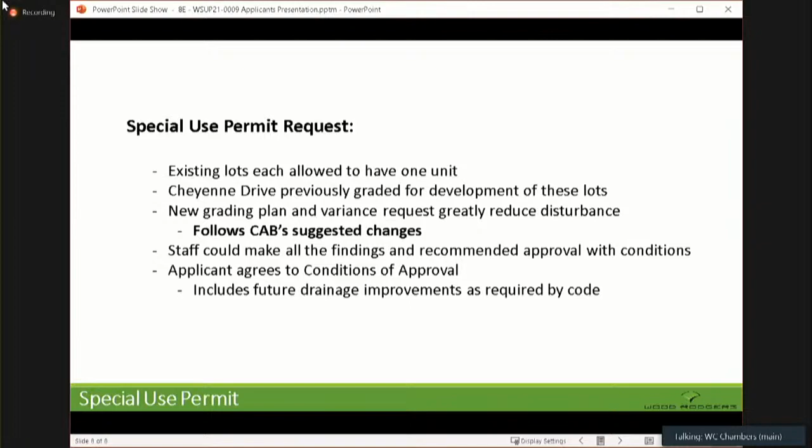With that, I will conclude my presentation. But again, just to recap, these are existing lots. They're legally created lots, and I think we've come up with a plan to really have the least amount of disturbance to provide access to a legally mapped lot. We're hoping that we've addressed the CAB's comments. We didn't take them lightly. We went back and spent several months re-looking at this thing, and I think we've come up with a really solid plan that addresses their comments. Staff has a series of conditions that also go along with that, and we agree with those conditions. With that, we'll be happy to answer any questions you have.

Thank you. Is there any public comment on this matter? I have no public comment in chambers. I do have a hand raised via Zoom. Ms. Crane, I'm going to allow you to speak. If you could unmute and state your first and last name for the record, please. My name is Shanda Crane, and I'm a resident at

17175 South Virginia Street, which backs up to Cheyenne, the easement drive known as Cheyenne previously. One comment I did want to make, I can speak on behalf of most of the residents here in this area. We are not opposed to new development in the area. We just want to ensure that the development is done correctly. Most of us have been out here for years and experienced a lot of erosion and drainage issues, so that's a big concern for us. As a resident at the end of Cheyenne Drive,

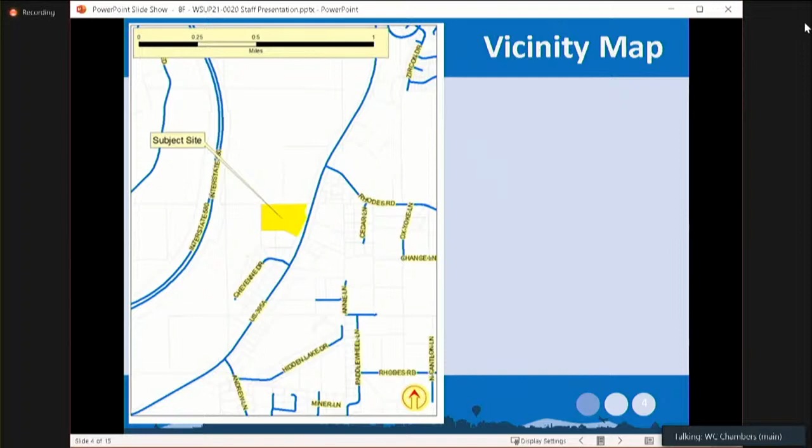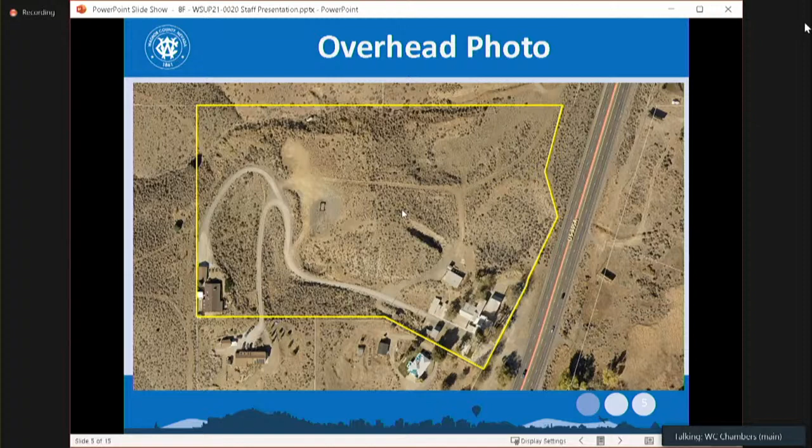This is an overhead view. You can see the little cluster of buildings in the southeast corner - that is where most of the facilities are. The proposed additional classrooms are proposed to be located towards the center of the project site. Next slide, please.

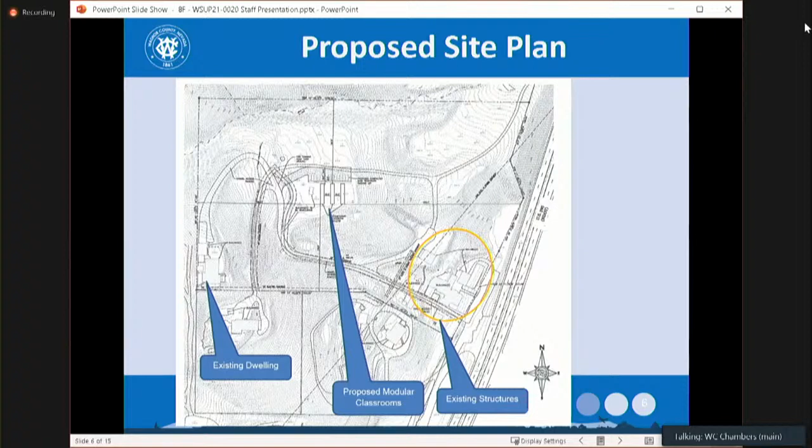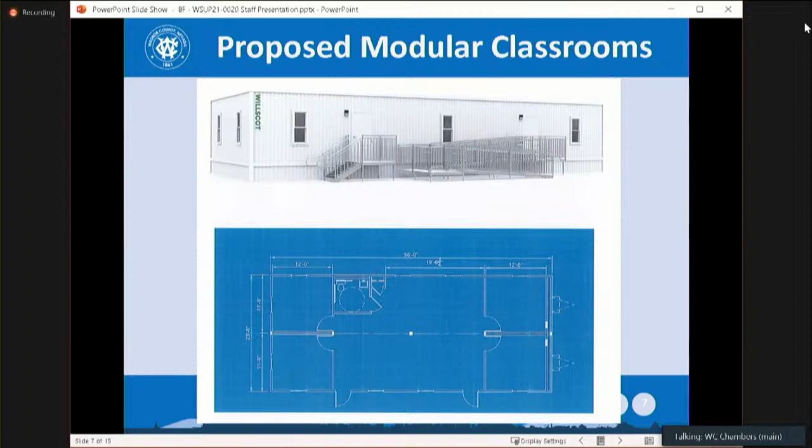This shows those proposed areas right there in the middle - the proposed modular classrooms, again towards the center of the project site. Next slide, please. This is what those classrooms are proposed to look like, and here are the floor plans - very simple, a little box that they bring in on wheels.

Next slide, please. Again, my evaluation is that there are really very few immediate neighbors. The use is appropriate and not dissimilar to previous uses on the site. Given standard code requirements, staff has no objection. We have landscaping requirements, we have paved parking requirements. There's some disused signage on the site that should come down, and any new signage should meet current code requirements.

Next slide, please. We did send this notice out to 43 affected property owners. The applicant did conduct a public meeting in lieu of a citizen advisory board meeting in that area.

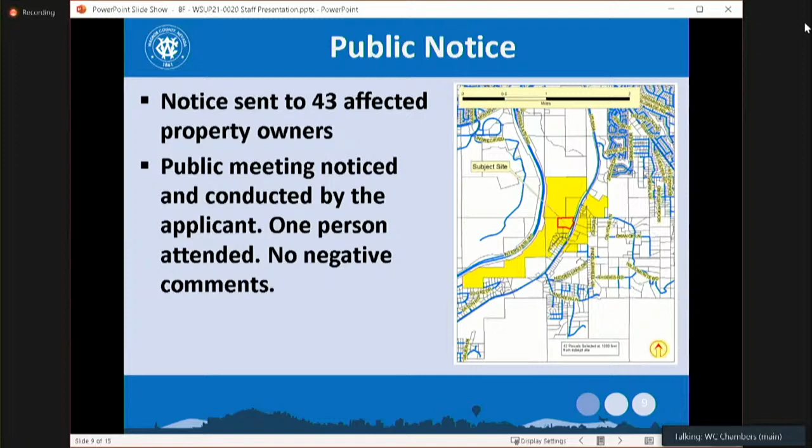One fellow showed up, and there were no negative comments, but the applicant can also address that. This went to all of the appropriate reviewing agencies, and no recommendations for denial were received. Those that provided conditions of approval have been included with your recommendation.

I won't go through each of the findings, but this is consistent with the area plan. The site's suitable. The issuance is not detrimental in my opinion. Finally, I would like to recommend approval, subject to the findings and conditions as listed in your staff report. I'm available for any questions you may have, and the applicant's representative is here as well.

Great, thank you, Roger. Okay, the applicant, do you have a? Madam Chair, if I may, I do just want to let the board know that Rob rejoined the meeting at 3:58, so he was there through most of that.

Good afternoon. For the record, Mike Railey with Christy Corporation here representing St. Nicholas Orthodox Academy. I do have just a brief PowerPoint. I think Roger did a very nice job. Some of this will be redundant, such as the location and whatnot, so I won't bore you.

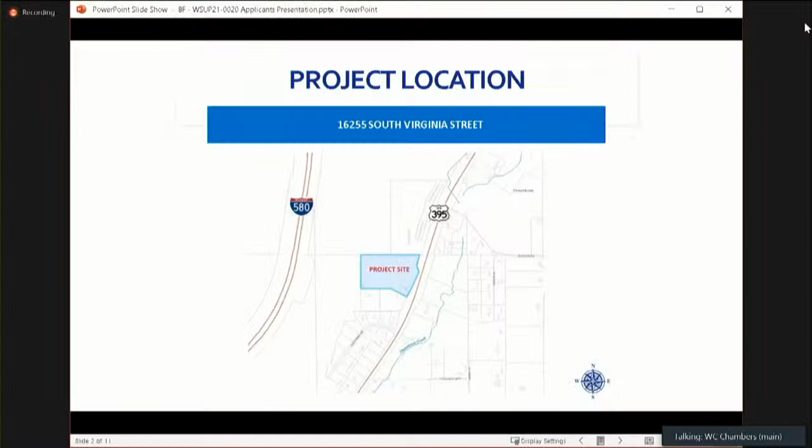So this is an aerial view of the site, as Roger mentioned. And I just want to clarify on the temporary versus permanent. The purpose of what we're calling temporary classrooms, the modular buildings, similar to what you would see at any Washoe County elementary school, is to allow the school to begin operation while the main campus is being constructed. We just didn't have time, they're still in the design phase. We're probably going to come back with another special use permit for the actual permanent building itself, but they wanted to be underway. So that's why we're calling these temporary classrooms, because we've put a limitation of 3 years on those classrooms, and then they'll be removed. And that area has already been previously graded, it fits well there, but that will be repurposed for another use associated with the school.

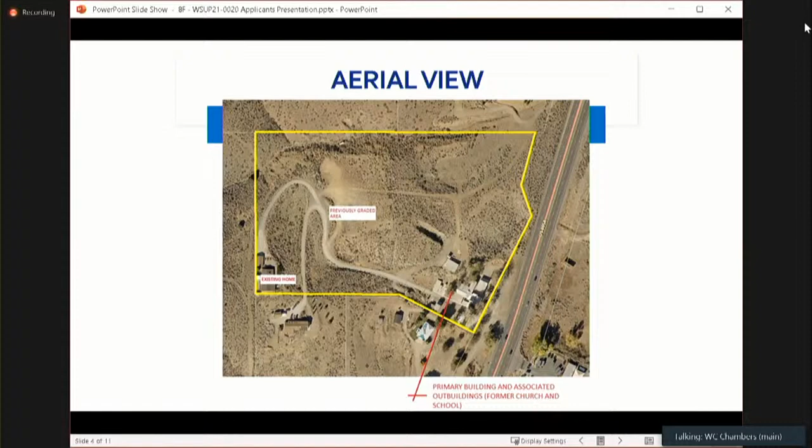So these are some existing photos of the areas where the classrooms will go. As you can see, it's been graded. It has been overgrown a little bit with sagebrush and whatnot, but it is previously graded. The other thing that's nice about this location is putting those modular buildings up there, they're really not visible from the highway, so nobody really sees them.

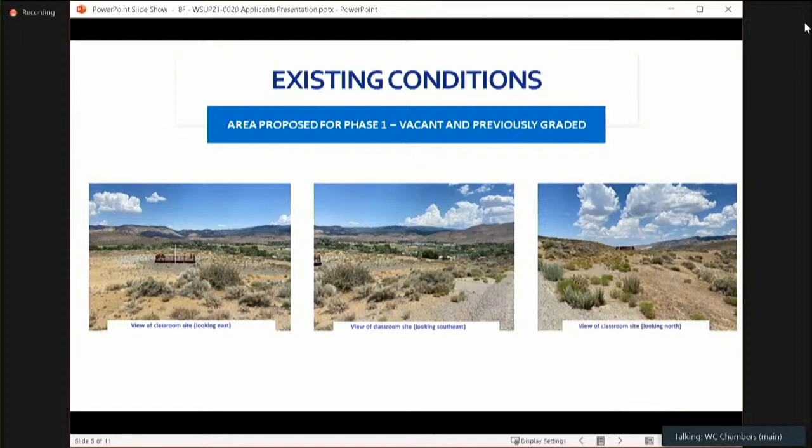As Roger mentioned, that's the existing building and some of the outbuildings where the new school will be constructed ultimately. The site has some interesting history. It was originally a stage stop back in the 1800s, and then it served as a divorce motel where people could stay to claim their Nevada residency. So it's got a little bit of a colorful past, and as Roger mentioned, most recently a church.

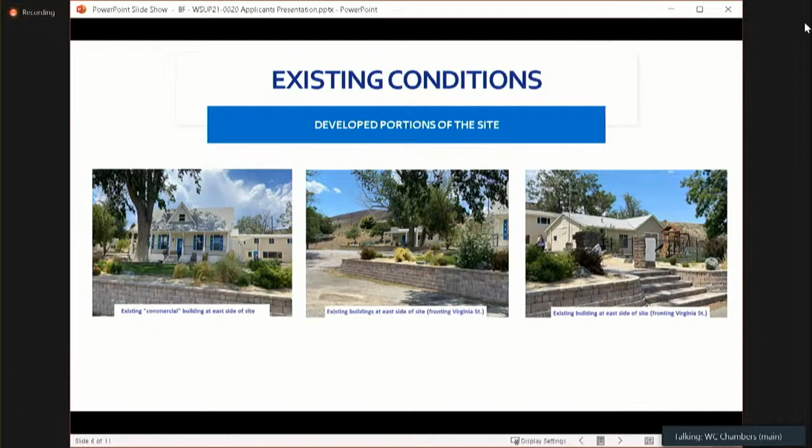I think Roger did a good job going over the site plan, so let's go ahead and skip to the next slide. As Roger mentioned, it essentially just establishes the ability to do a school there. The main campus will come back under a separate permit. With this phase, only 10 to 12 students and 4 full-time teachers and 1 half-time teacher would be on site.

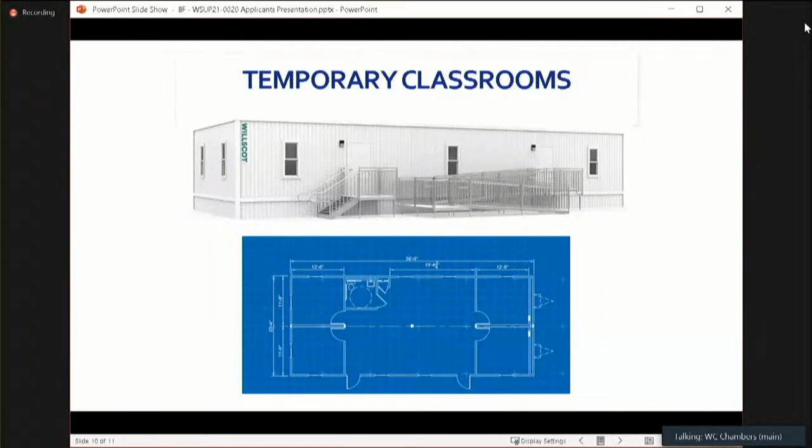Already graded, the school hours are 9 to 3:30. We did hold a neighborhood meeting. I had 1 call in favor, 1 person came to the meeting in favor. So I think it's a good use for the site. Roger included that in his presentation. With that, I'm happy to answer any questions. Dr. Janet Cummings with St. Nicholas Academy is attending via Zoom, and she can answer any questions too regarding the operations if you have any. Thank you very much.

Madam Secretary, do we have any public comment? I have no public comment in chambers, and I have no hands raised via Zoom. Okay, let's close public comment and bring it back to the board. And I have some questions. Maybe Roger, appropriately, are we going to, is there a condition to have parking and to have landscaping?

Essentially the condition is to meet current code in all respects - simply meet the generally applicable development code standards in all respects, for parking and landscaping, including what is required by code anyway. We don't have to actually say it, we can simply say we're not waiving everything and we're good. That just means go to the standard code, do what any civic or commercial use would be required to do.

So we're not varying those standards? We are not. Okay, good, thank you. Or at least that is my recommendation. And they're in the conditions of approval? Yes, great. Any other questions, Mr. Stanley? Thank you.